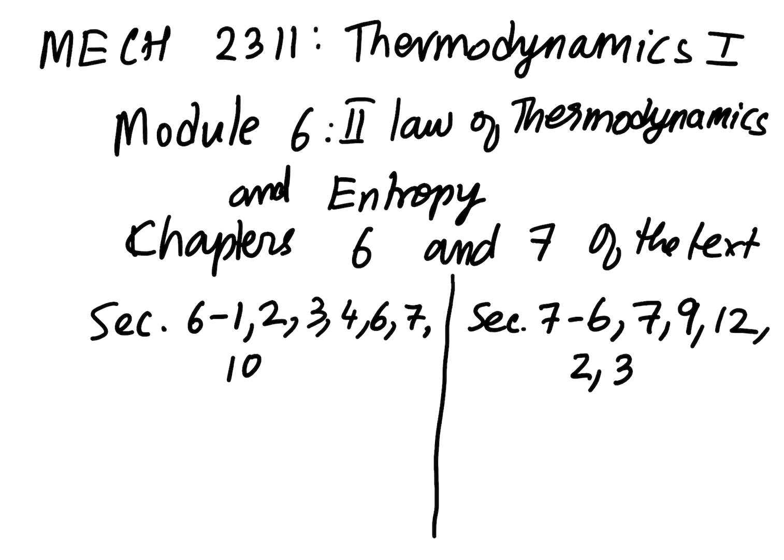Now, let's begin our discussion by asking a simple question. What is the first law of thermodynamics? What did we learn as the first law of thermodynamics?

If you state it in words, that would be: energy can neither be created nor be destroyed. It may be transformed from one form to another.

If you write it in terms of symbols, we wrote it as Q minus W equals delta U plus delta KE plus delta PE. Or in the intensive form, this is Q minus W equals change in internal energy per unit mass plus change in kinetic energy plus change in potential energy.

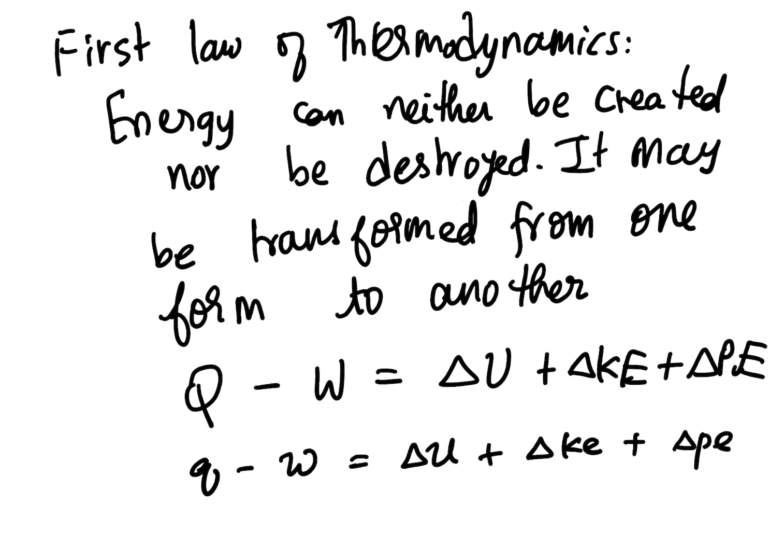This statement, the first law of thermodynamics, tells us an account or balance of the energies.

It merely implies that if you apply heat or do work, you can cause a change in the energy of the system. I'll just write internal energy and leave the other two for simplicity. You can do work and change the internal energy, you can transfer heat and change the internal energy, and so on.

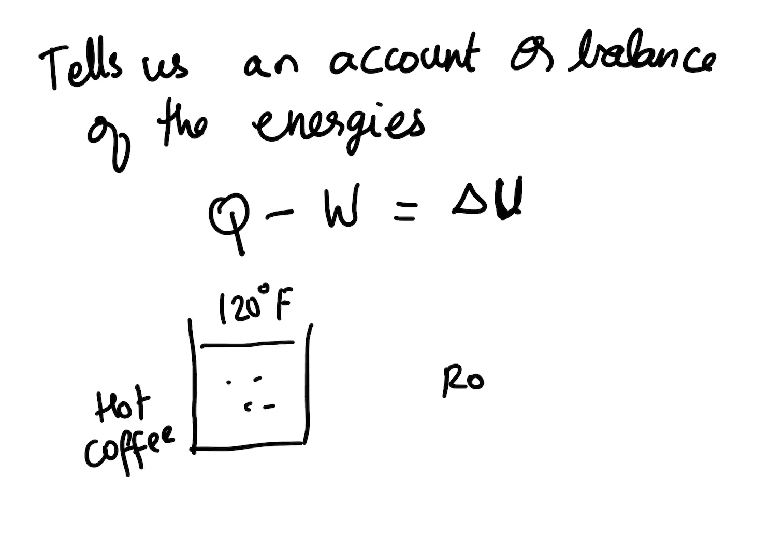Now suppose you have a hot cup of coffee at, let's say, 120 degrees Fahrenheit, and the room is at something like 70 degrees Fahrenheit. You do know what will happen: the coffee will lose its heat if you leave it and come back after some time. Eventually it will reach the same temperature as the room.

All the heat energy that the hotter coffee had has now been transferred to the room, which is at 70 degrees Fahrenheit. So if you think of the coffee, assuming there is no vaporization or evaporation, and think of this as your control volume, you had a certain amount of energy in here. There is no movement of the boundary, so let's just assume that work is 0.

You had a certain amount of internal energy due to the temperature of the hot coffee, and because heat left the system, the heat transferred equals the change in internal energy. In this case, the heat left the system, so heat would be negative, which means the change in internal energy is also negative, meaning there is a decrease in internal energy, or a drop in temperature.

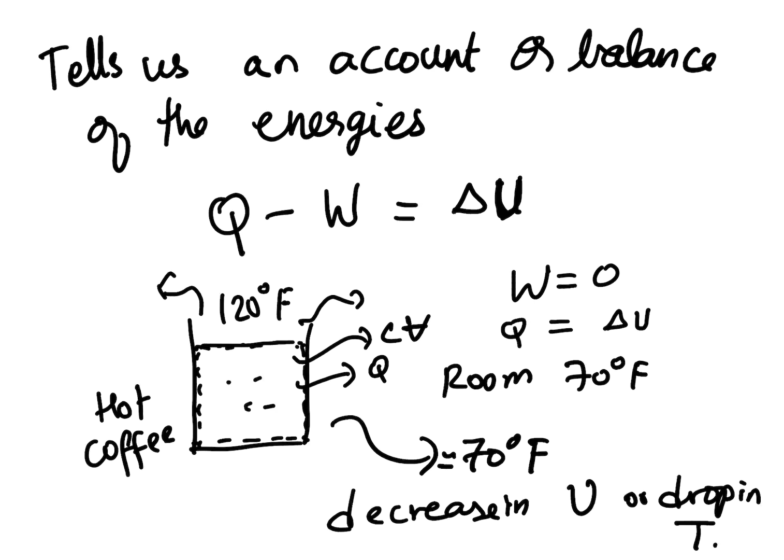This is familiar from everyday life. Something hot cools down eventually over time.

But if you think of the opposite situation: you have your coffee at 70 degrees Fahrenheit after a long time, and you have your room also at 70 degrees Fahrenheit. We never see, or never have seen, the cold coffee warming up by itself.

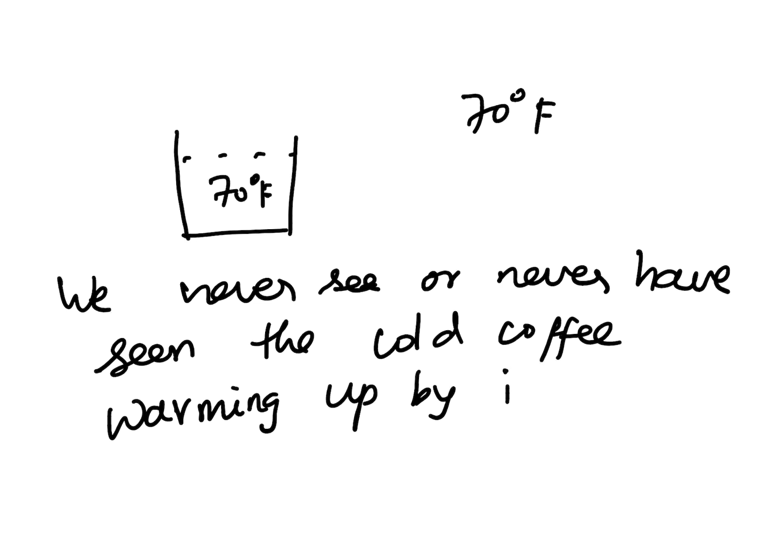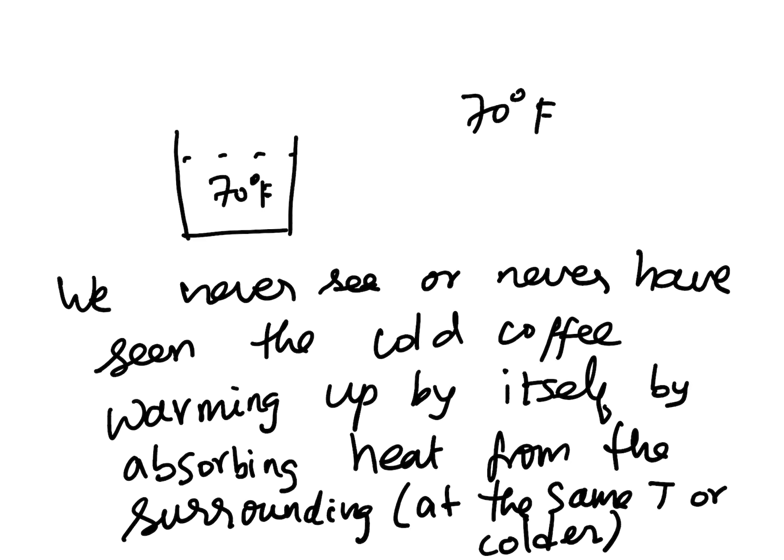by absorbing heat from the surrounding, which is either at the same temperature or is even colder. You never see the coffee that's at the same temperature as the room spontaneously picking up heat and becoming hot coffee again. You never see that happen.

Although there is no restriction on the first law statement that says this cannot happen. There is no reason to think that you could not have heat transfer from the surrounding to the system by itself, leading to an increase in delta U. If Q were positive, then delta U will increase. That's still possible according to the first law.

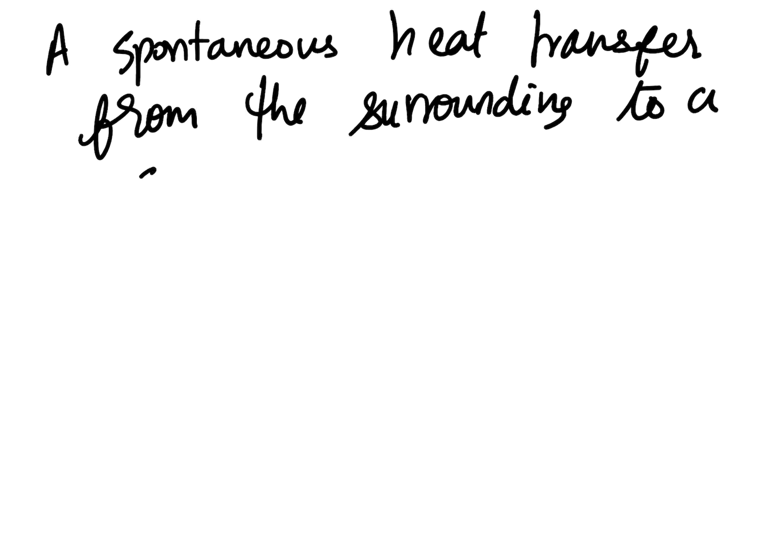So a spontaneous heat transfer from the surrounding to a system that is at a higher temperature is not seen in nature, first of all—it doesn't happen—but it is not forbidden by the first law of thermodynamics.

So we have a disconnect. The first law alone is not enough to completely predict or analyze a thermal system.

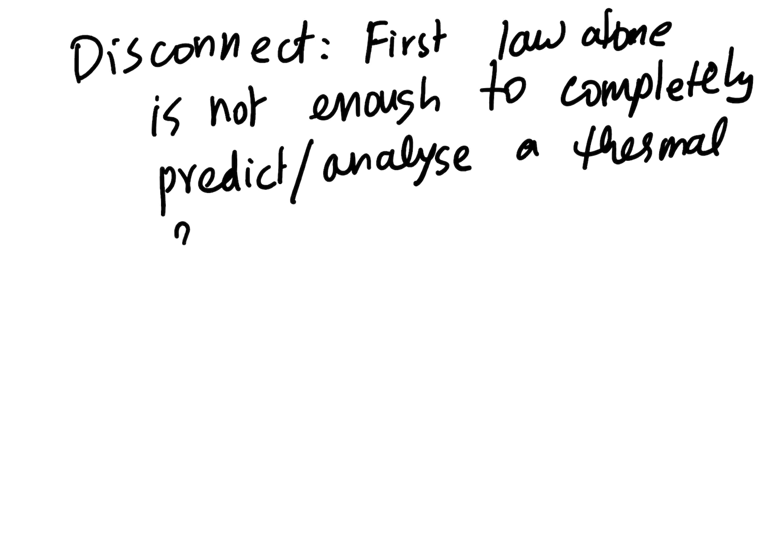Why? There is a certain directionality to natural processes. Things always cool down, hot to cold. Things always go from high elevation to lower elevation. Things always roll down a hill.

A ball rolls down a hill, but never does a ball at the bottom roll up by itself. That never happens. Hot coffee cools down, but cold coffee never warms up by itself.

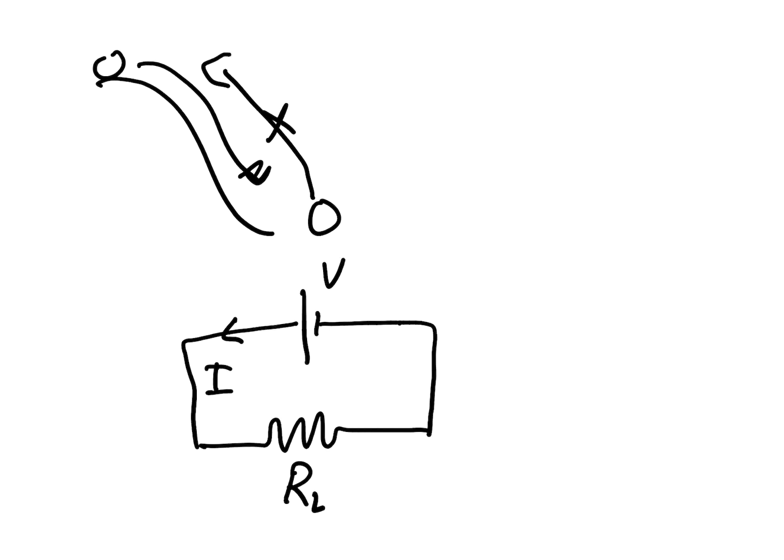If you have a battery connected to an electrical load and you supply a current, you can calculate the power dissipated by the resistor due to heat. Power dissipated due to resistance would be I squared R.

If you put your hand on top of this electrical load, you'll feel that heat being dissipated by the resistor. But you'll never recover this electrical energy even if you supplied the heat that was removed from the resistor. If you ended up heating up the resistor, you cannot produce the electrical energy that was dissipated as heat. So the moral of the story is processes

have a direction, and we need a second law of thermodynamics to tell us what the direction is for a given process to take place. So the second law of thermodynamics was stated or devised to explain or capture what is seen in nature, and there are a couple of ways in which the second law is stated.

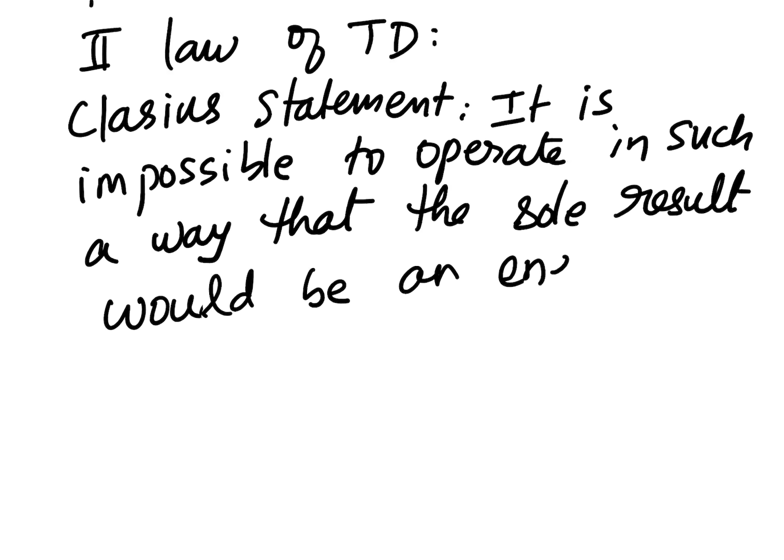Second law of thermodynamics: we have the Clausius statement, and then we have the Kelvin-Planck statement. Let me first state the Clausius statement, which is: it is impossible to operate in such a way that the sole result would be an energy transfer by heat from a colder to a hotter body.

The second law of thermodynamics stated by Clausius is that it is impossible to operate in such a way that the sole result would be an energy transfer by heat from a colder to a hotter body.

Now recall the example about the coffee, which is at 70 degrees Celsius, or a coffee at 70 degrees Fahrenheit. Suppose the coffee is at 70 degrees Fahrenheit and the surrounding is also at 70 degrees Fahrenheit. We wouldn't expect that the surrounding would spontaneously give up heat and make the coffee 120 degrees Fahrenheit while remaining or cooling down below 70 degrees Fahrenheit.

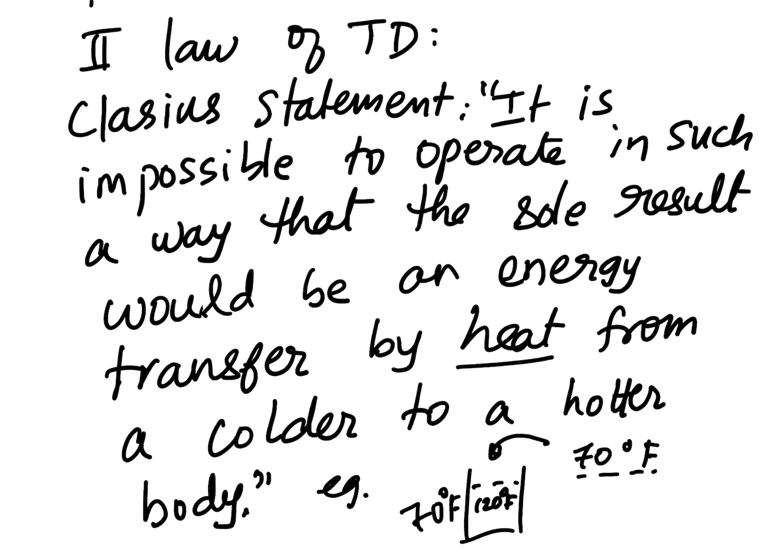It's not physically possible, and this statement of the second law is simply saying that. It's not proving anything, it's just stating the observation that it is impossible to operate in such a way that the sole result would be an energy transfer by heat from a colder to a hotter body. Now there is another version of the second law of thermodynamics, called the Kelvin-Planck statement.

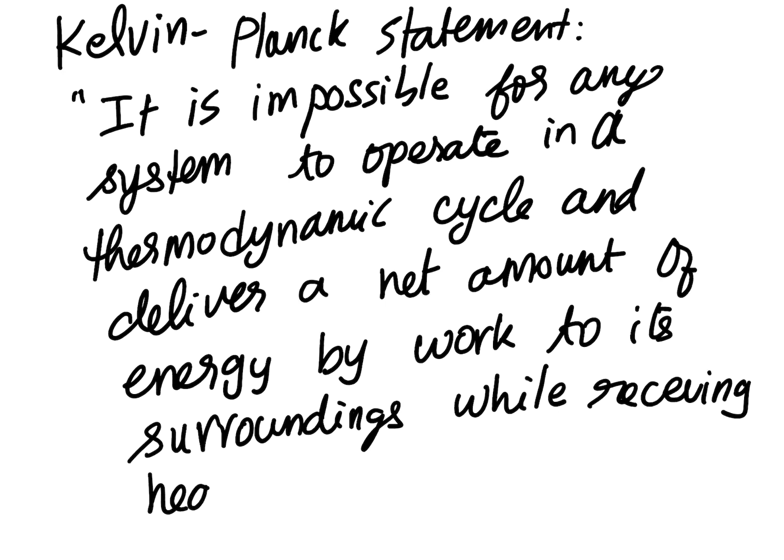It states: it is impossible for any system to operate in a thermodynamic cycle and deliver a net amount of energy by work to its surroundings while receiving heat transfer from a single thermal reservoir.

It is impossible for any system to operate in a thermodynamic cycle and deliver a net amount of energy by work to its surroundings while receiving heat transfer from a single thermal reservoir. This is a long way of saying it's not possible to convert heat completely to work. That's the short version of the Kelvin-Planck statement.

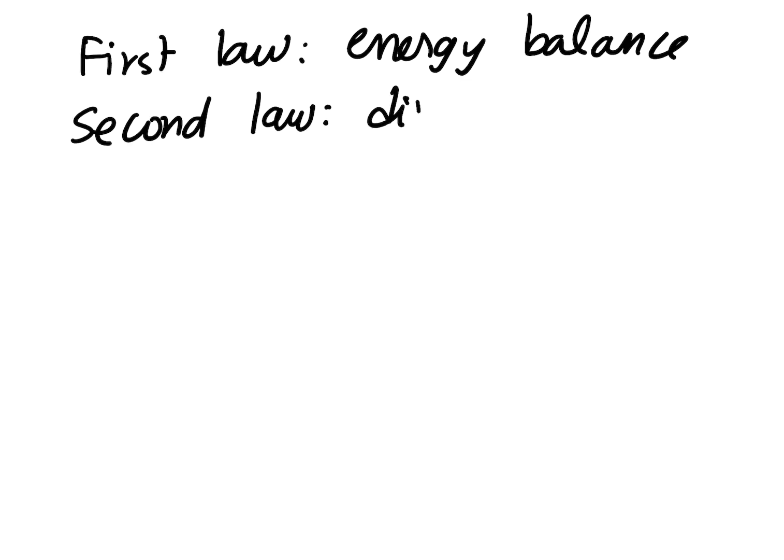Moving on, we spoke about the first law and the second law. The first law, which is an energy balance, and the second law that gives us a direction or natural progression for physical processes. The second law was merely a statement saying some processes, or all processes, can happen only in a particular way, as in transferring heat from a hotter object to a colder object and not the other way around. It was just stating this is the natural and permissible direction for any process.

Any process that is in violation of the second law is deemed to be impossible. That is, any process that claims to transfer heat from a colder object to a hotter object is theoretically forbidden by the second law, and so far has not been observed in everyday engineering or physical experiments.

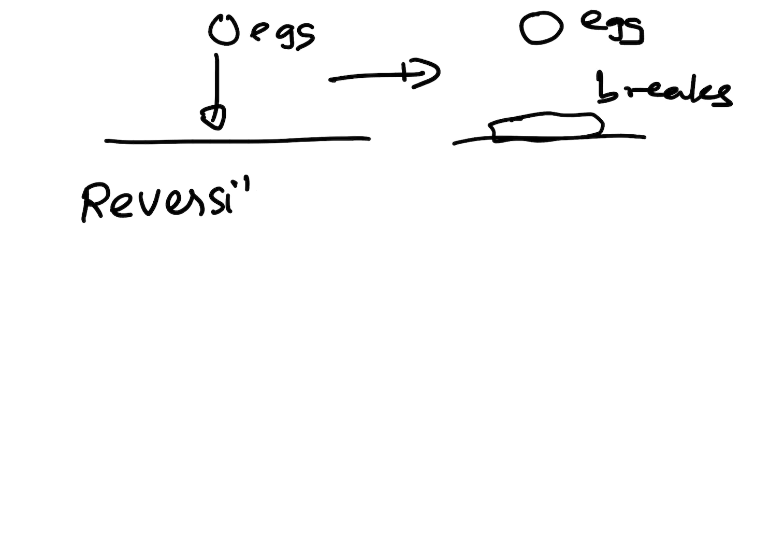Now, we can think of a question: if you have a surface and you drop an egg onto it, it crashes and breaks. You can watch this movie a million times, you can play this back, but in reality you will never see a broken egg organize itself and turn into an egg that is unbroken. The reverse will never happen, which brings us to realize that there are processes that are reversible and then there are processes that are irreversible.

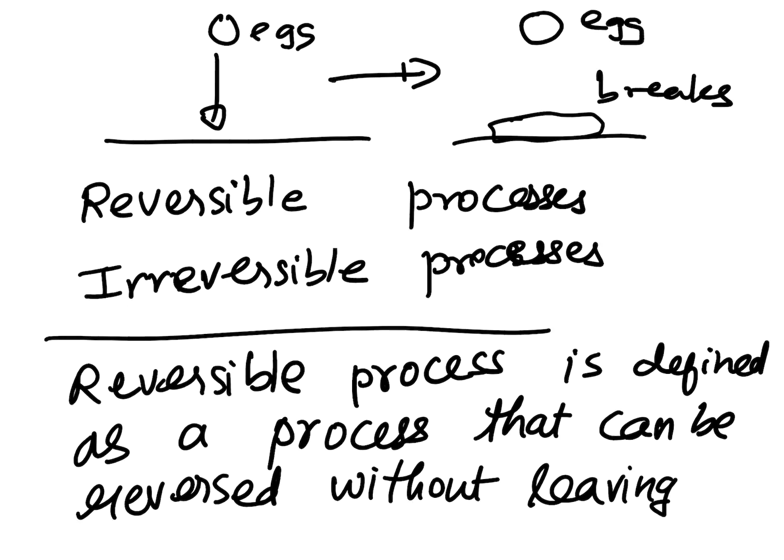Reversible processes and irreversible processes. So we need to define what these are. Let's first define a reversible process. A reversible process is defined as a process that can be reversed without leaving any trace on the surroundings. That's the really important point: without leaving any trace on the surroundings.

And any process that is not a truly reversible process is an irreversible process.

For example, if you have a surface and a block, and you are sliding the block on the surface, what happens at the interface between the block and the surface? You have friction, and friction heats up both the block and the surface. You know this from everyday experience: if you slide the block fast enough, the surface is going to get a little bit hotter.

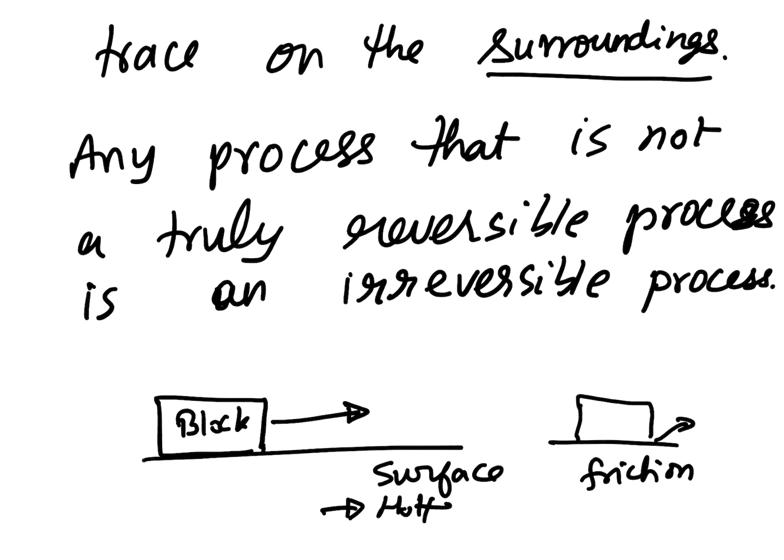If you think of your block as your system and the rest of everything as the surrounding, because of the movement of the block along the surface, the surrounding is going to get hotter. You have heated up the surrounding, making it a little bit hotter than it was.

Now, if you slide the block back, that is, if you reach this position and then reverse your motion and slide it back, what will happen? You are not going to get the heat back. You are not going to restore the surrounding to its former state. When you bring back the block here, there is more heat dissipation on the way back as well. Friction generates heat in the forward stroke as well as the back stroke, and as a result the surrounding gets even hotter.

By restoring the block to its original position, even though your system was taken from state 1 to state 2, from position 1 to position 2, and brought back from position 2 to position 1, you have restored your system to the original state, but you have left the surrounding hotter than it was when you began. So this process is an example of an irreversible process, wherein the friction heats up the surrounding and moves it away from its original condition or state.

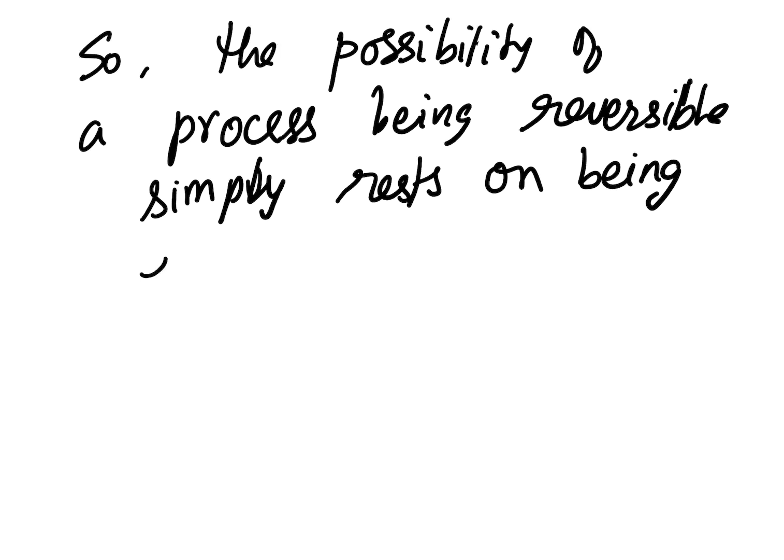So let me write a statement: the possibility of a process being reversible simply rests on every step of the process being reversible and without any irreversibilities.

Essentially, this statement means all real processes are irreversible to varying degrees. That's the only difference. They may be more irreversible or less irreversible, but they are irreversible.

All real processes are irreversible to varying degrees, and what we call a reversible process is an idealization that is used as a reference in analysis. It's not something that's found in nature. It's usually a reference in analysis as the ideal case, that no real system can attain it, but we wish to attain it. So that also tells us there are irreversibilities in real world processes.

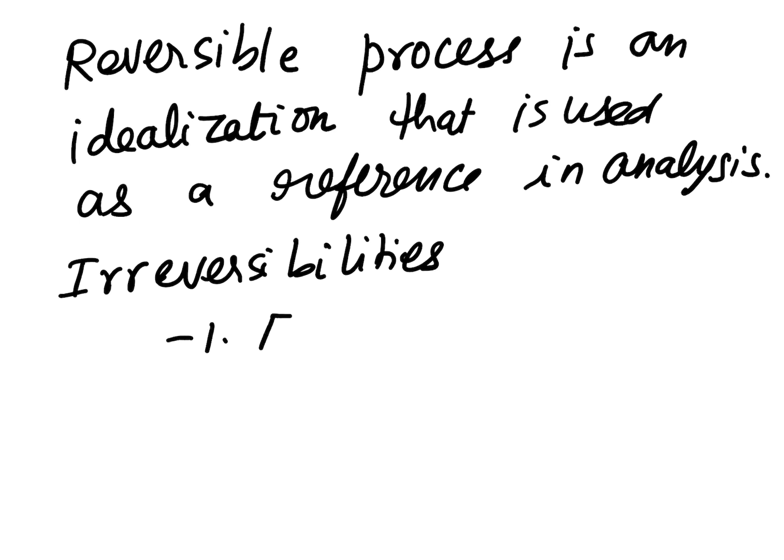The main irreversibility that we encounter often is friction. Friction could be between solid and solid, like the example we saw. It could be between solid and fluid, like flow past a surface, or it could be within the fluid due to viscous effects or velocity gradients. It's very common for us to think of friction.

If you have a piston and a cylinder, with gas inside, and you think of your control volume to be the volume within the piston, you have friction everywhere. You have friction when the piston slides against the walls of the cylinder. You have friction or viscous effects within the gas, and you have viscous effects between the gas and the wall of the cylinder. So you have gas-wall friction, gas viscosity, and cylinder-piston surface friction. You have all types of friction.

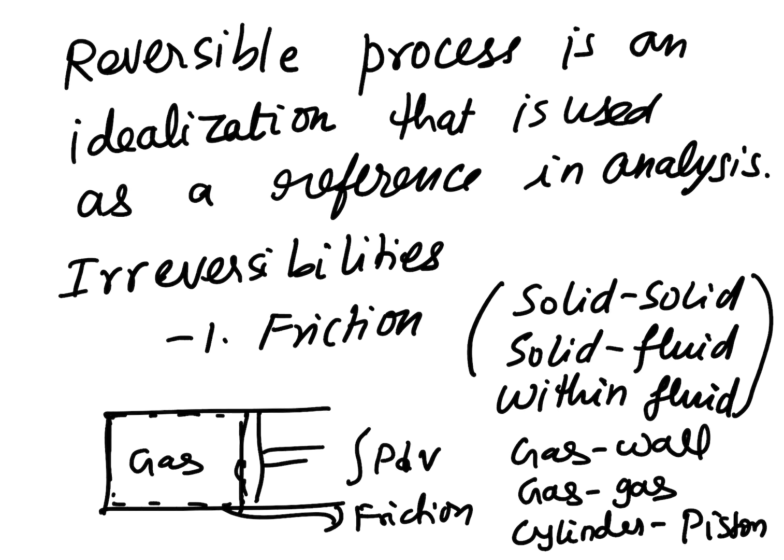That's why if you do a certain amount of work, let's say a certain amount of boundary work by compressing the cylinder, there is some heat generation at the boundary. So let me write this on a separate page. If I have a piston and I compress it from V1 to V2, P dV is the work I do. There is heat generation at the surfaces. Wherever friction acts, friction generates heat.

So that is heat that leaves the system. If you have very poor insulation or no insulation, that is heat leaving the system. So you have Q minus W equals delta U. That is, if you had no heat transfer, if you didn't generate any heat, if Q equals 0, the delta U, or the increase in internal energy of the gas, is due to the work done, or all the work done goes into heating up the gas.

All the work done raises the internal energy of the gas. But if Q is not 0, then you have a lesser amount of energy available to raise the internal energy of the gas, or in other words, some of your work input that you put in has been wasted because of friction.

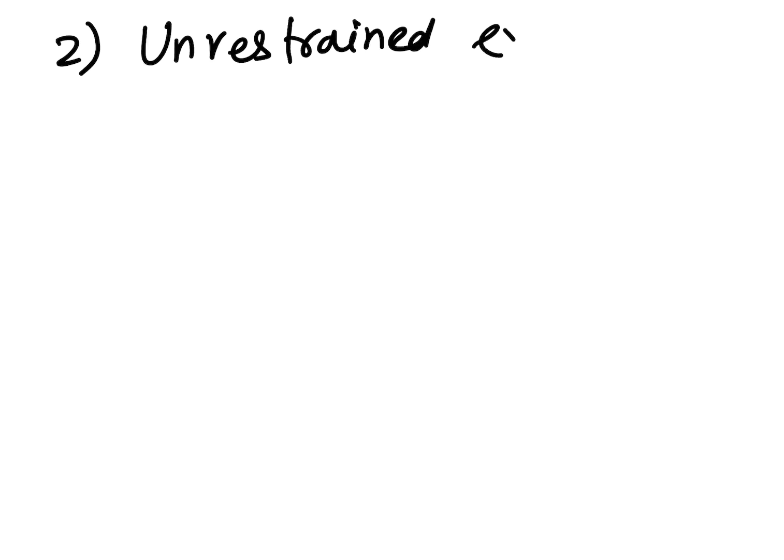So irreversibilities always cause undesirable effects that we wish to mitigate, and we'll see more about this in examples. Another type of irreversibility is the unrestrained expansion of a gas. Now, why is this an irreversibility?

If you have a gas that's highly compressed, like for example this could be CO2 that's highly compressed, and you are locking this down by applying restraining forces, if all of a sudden you remove these forces, you are going to have the gas push back against the piston and let it freely expand. So you have the gas pushing back and you have unrestrained expansion.

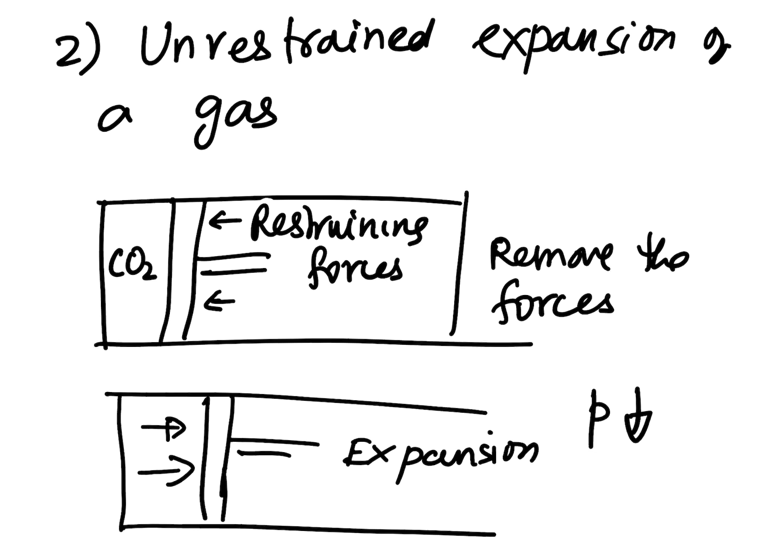If you expand too fast, what happens? The pressure drops quickly, which can cause the system to cool down. So the expansion will cause the pressure to drop. A drop in pressure is accompanied by cooling or condensation, which causes cooling and causes heat to leave the system.

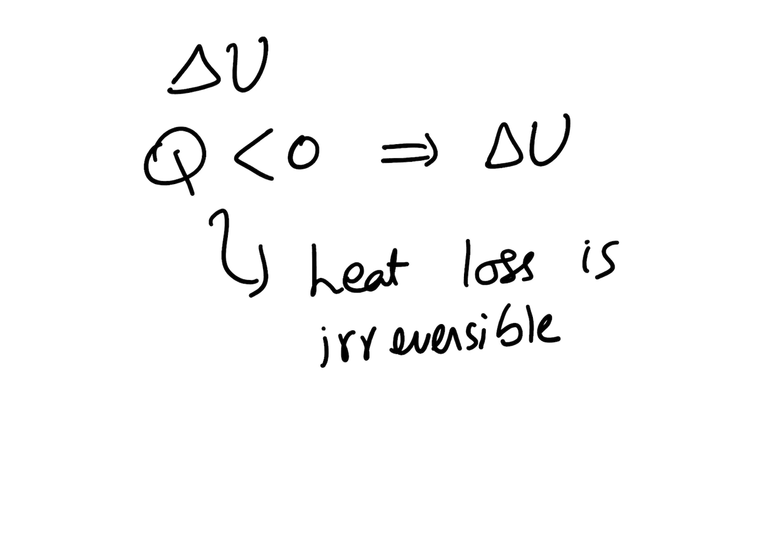Heat loss. Now what that means is you have a certain amount of gas with a certain energy content delta U, and because of the heat loss, the energy content of the gas is irreversibly lost. This heat loss is irreversible. It's not coming back when the system comes to a stop, or when the gas stops expanding. So this irreversible heat loss is a consequence of unrestrained expansion.

The third form of irreversibility is heat transfer, which is, again, a direct consequence of the second law. If you have a hot object, it cools down, but whenever you have an object that's hotter than the surrounding, it never spontaneously warms up. So it always flows one directionally.

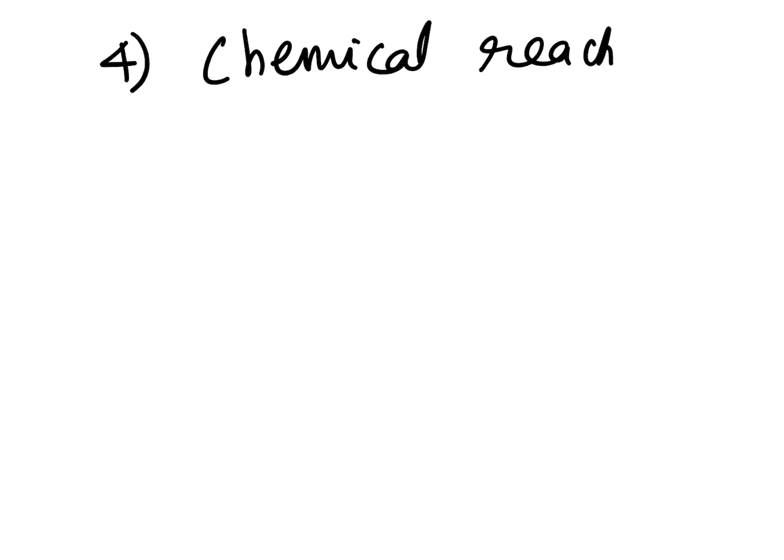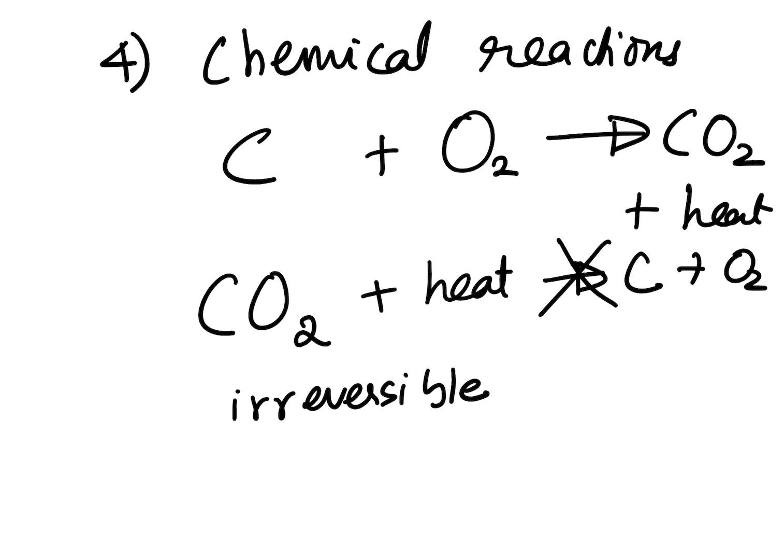Another type of irreversibility that is encountered is chemical reactions, although in this course we don't see much of that. For example, if you had a fuel, carbon, and you combusted that, you get CO2 plus heat. Now if you take CO2 and you just apply the same amount of heat, you're not going to get the carbon and oxygen back. This doesn't happen. Usually chemical reactions are irreversible, although we won't deal with much of that in this class.

Now within reversible processes, we want to distinguish between what is called internally reversible and externally reversible processes. Now what is internally reversible? If a process is called internally reversible, if no irreversibilities exist within the boundaries of the system during the process.

And an externally reversible process is one in which no irreversibilities occur outside the system boundaries during the process.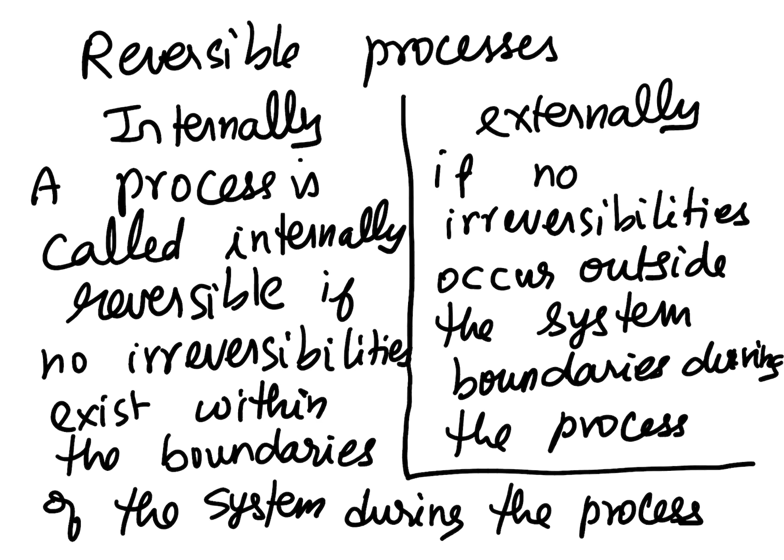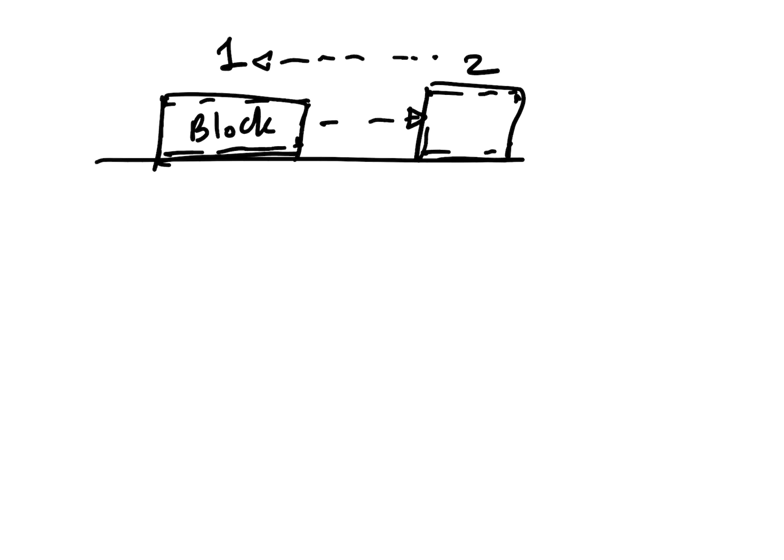Now let's bring that example back. You have your block, it is at position 1, you take it to position 2, and then you bring it back to position 1. Now during this trip, if you consider the block to be your system, we are just moving it from 1 to 2 and bringing it back. Within the block, which is basically a solid, there is no friction or any other irreversibilities in this case. So this would be an example where this is internally reversible.

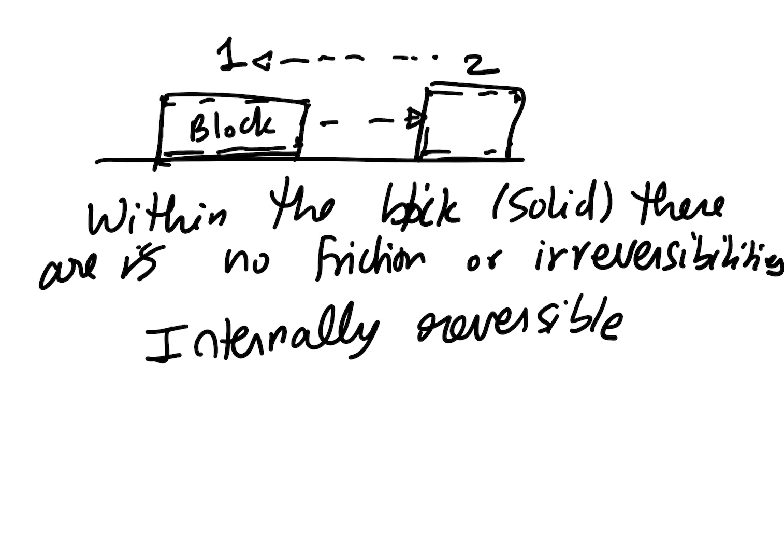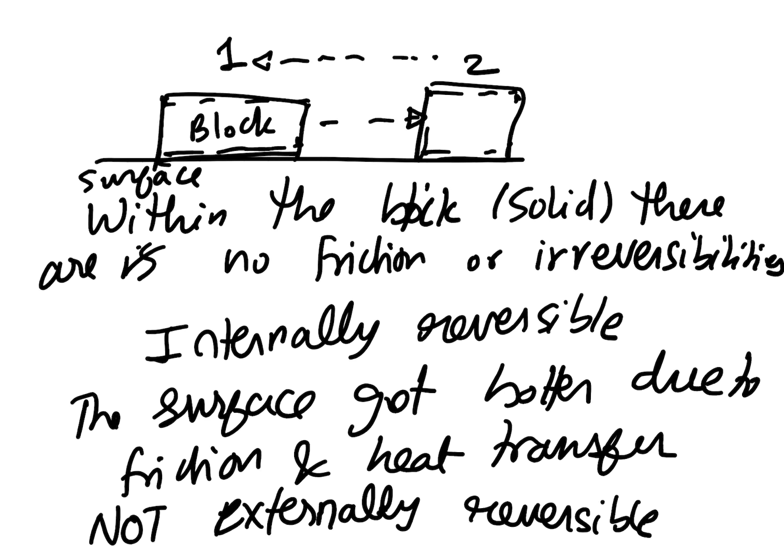But if you think of the surrounding, that is the surface, it got hotter due to friction and heat transfer. So as far as the surrounding is considered, this process is not externally reversible. If you don't look at the surrounding, this process is internally reversible. If you look at the surrounding, this process is not externally reversible.

A process is reversible if it's both internally and externally reversible. Most processes that we can think of are irreversible, but many of them are at least internally reversible. So most are irreversible, period.

Many are internally reversible, but they change their surroundings irreversibly. And then all processes in nature are irreversible because no processes are externally reversible as well. That would be an exception that's not been found so far.

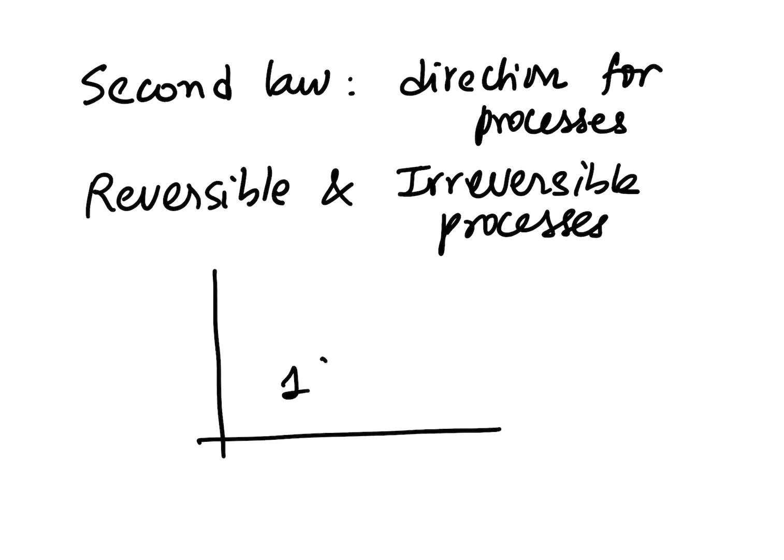What we can understand from that is if you take a particular state 1 to 2, okay, could be on, let's say, PV coordinates. There is a path from 1 to 2. There are an infinite number of paths from 1 to 2. You could take any path to go from 1 to 2, and then there is one path which is reversible, and then there are many others that are irreversible.

Now all these irreversible paths, they differ from each other in the degree of irreversibilities. They differ in the degree of irreversibility.

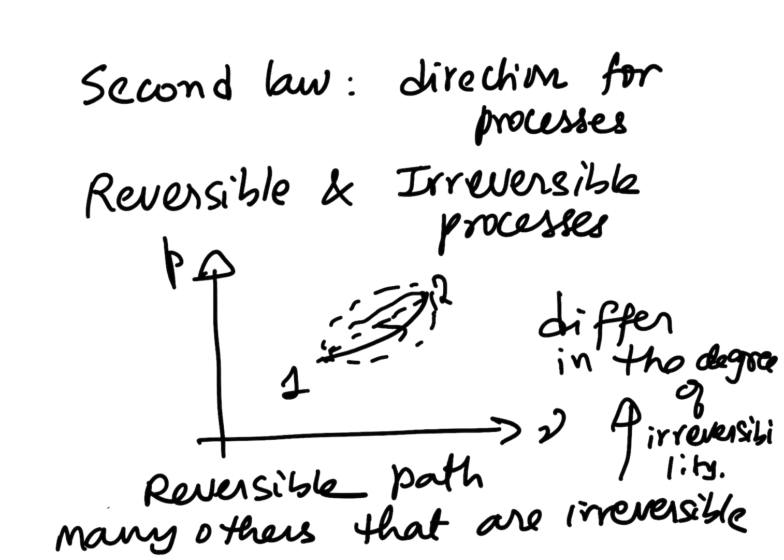Now, if you have a need to go from state 1 to state 2, you want to choose the path that is the most closest to being a reversible path. Just keep that in mind. Any good engineer would design the path 1 to 2 as close as possible to being reversible, to minimize energy losses. Now, what do I mean by that?

Suppose you have Q minus W equals delta U. You want to make, if you are transferring a certain amount of heat, the heat that leaves the system is usually due to friction or irreversibilities. Now, if you want to convert this heat into either work or internal energy or both, you want to make sure that the heat loss is minimum, that this Q out term is as small as possible.

If you want to design a process, you want to restrict or reduce the amount of irreversibilities such that all the heat that you provided goes into doing something useful, like work or raising the internal energy of the system. Why do you want to do this? Because Q in is the heat that is input, and that's directly related to the energy bills. The heat input is directly due to the amount of fuel that you combust to create that heat. So you don't want your energy to be wasted, because that will incur more cost, and that's what we, as engineers, look out for.

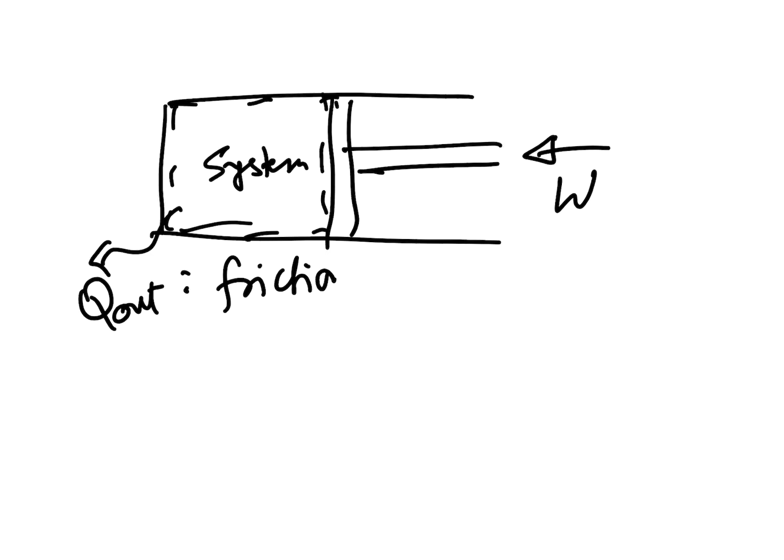The other situation is if you have a piston, for example, if you try to do work on the gas and this is your system, again the heat that leaves the system is due to friction or irreversibilities. And if you think of Q minus W equals delta U, if you do work to raise the internal energy of the gas, you want this to be as small as possible so that all the work that you do is converted into internal energy.

And this work is, let's say, done by connecting to a horse and wheel, or it's connected to a cycle like a bicycle, or it's connected to a motor. Whatever it is, work that you do mechanically, you have to expend energy for that, which comes with a cost. So this is directly related to the energy or money that you spend, and to get useful outcomes out of it, you need to minimize the irreversibilities in this system.

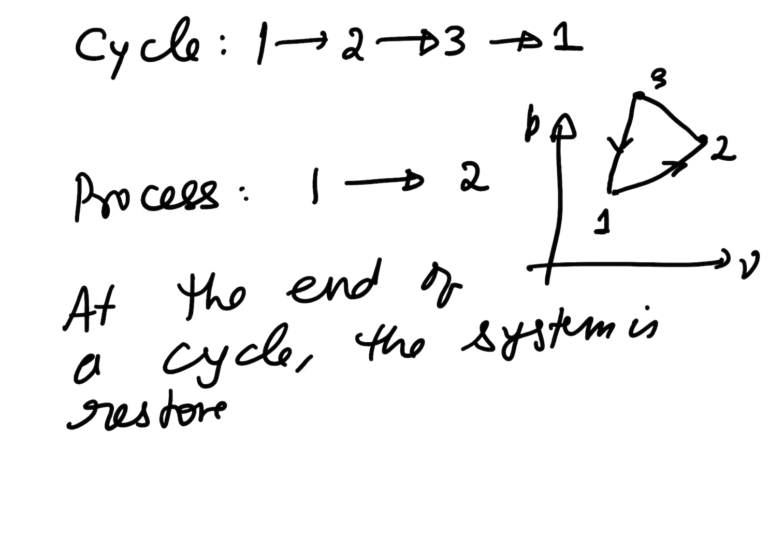Now a cycle is one in which you could have multiple states that you visit, 3 and then 1. So if you go from 1 to 2 to 3 and back to 1, that is at the end of a cycle. At the end of a cycle, the system is restored to its initial state. That would be a cycle.

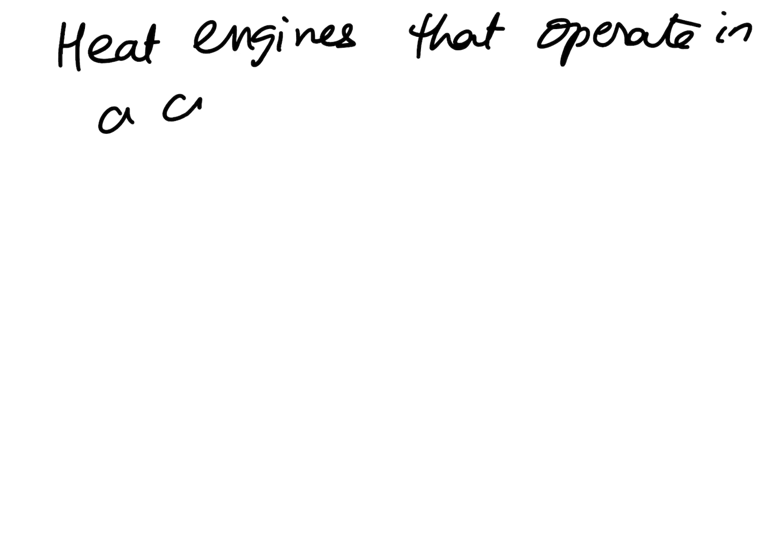And to go from one state to another, we have different processes. These processes could be reversible, they could be irreversible, but at the end of the cycle, the system comes back to its initial state. It may be having a lot of intermediate states. Now, one reason why we define cycles is that we like to have devices, like for example, heat engines, that operate in a cycle to produce mechanical work from the heat energy of a working fluid.

Okay, now what is this heat engine? Obviously this heat engine operates in a cycle. You do know that because your IC engine...

That runs your car basically has these 4 strokes, where energy of the fuel, chemical energy of the fuel, to be very specific, chemical energy of the gasoline, is converted to mechanical energy that drives the wheels, that makes the wheels spin. There is a lot of energy conversion steps from the chemical energy of the fuel to the mechanical energy that drives your car. And you can think of, if there are multiple processes between these two end states, they can be reversible, they can be irreversible.

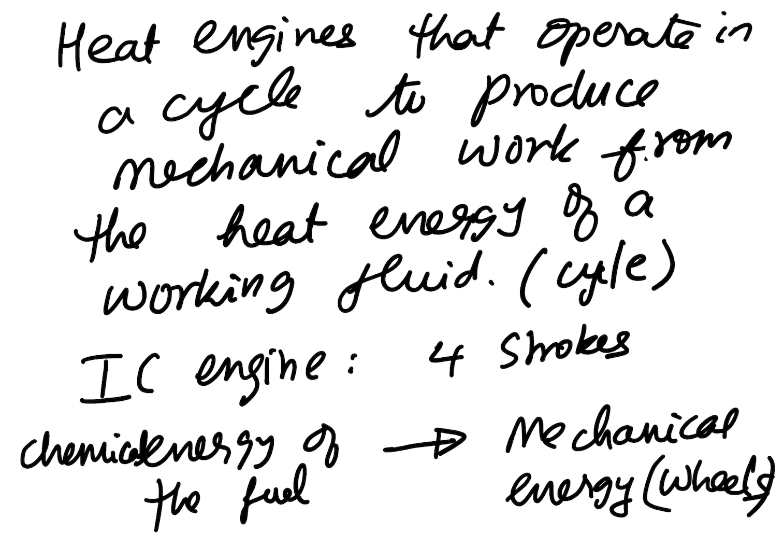Within irreversible, they can be slightly irreversible, they can be moderately or extremely irreversible, making the process cost effective or not cost effective. So we need to understand what is the ideal way to operate a heat engine, so that we can understand how far are we when we design real processes.

Okay, so first of all, what is a heat engine? A simplest heat engine that you can imagine is also depicted in figure 6-10. It consists of 4 components. The simplest heat engine can be constructed with 4 thermal devices, one being a boiler.

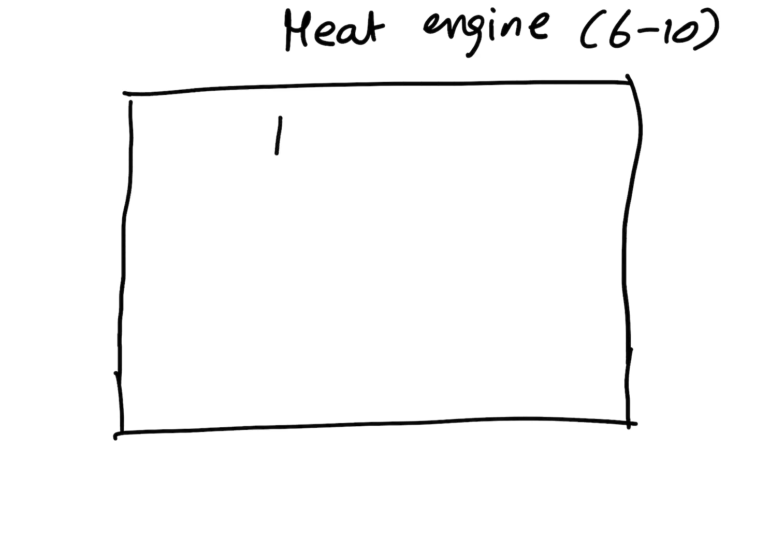Let's say we start with a boiler where you produce hot steam. So from the boiler you have hot steam, you input energy as heat, you vaporize the water, turn it into saturated vapor or even superheated vapor, and then you flow the steam onto a turbine.

A turbine expands the hot steam at high pressure. It converts the internal energy and kinetic energy of the fluid to mechanical energy, which is shaft work. So you input heat here, you extract work here.

Okay, so from the turbine, going into the turbine you have high temperature, high pressure steam, and coming out of the turbine you have spent steam, which is usually high temperature and low pressure. Have spent steam that's coming out, and then you have what is called a condenser.

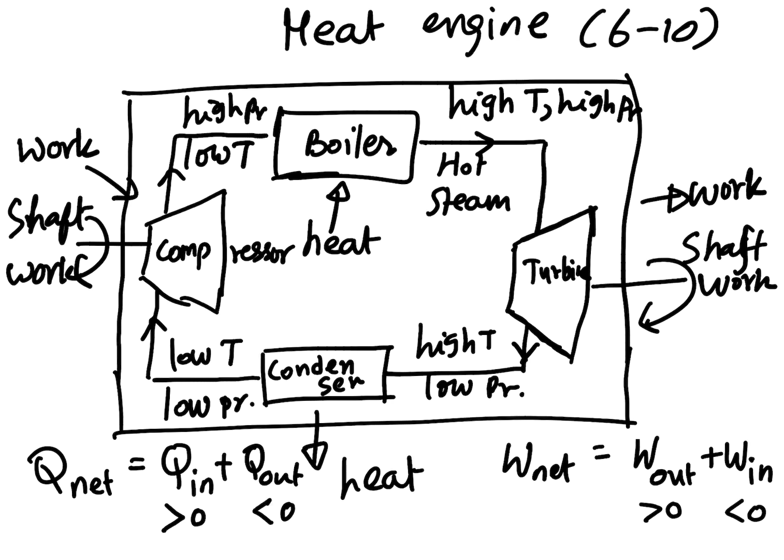So a heat engine is really a system that converts thermal energy into mechanical energy, and it requires at least 4 components identified here to carry out this process. So what would be the efficiency of such a system? If I write work net is work out plus work in, and Q net equals Q in plus Q out.

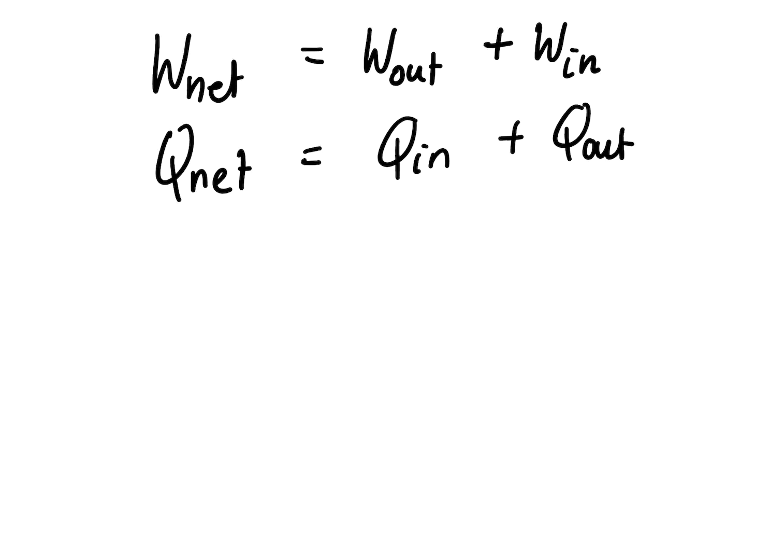Now if you think of the boiler, you provide the heat there. If you think of the condenser, the heat is rejected by the fluid to the surrounding, and usually this is irrecoverable. That is, you just eject the heat. If you have your car radiator, the hot water dumps the heat through the car radiator into the atmosphere, and you don't get it back. It's done, it's gone. So it's not something you can reuse.

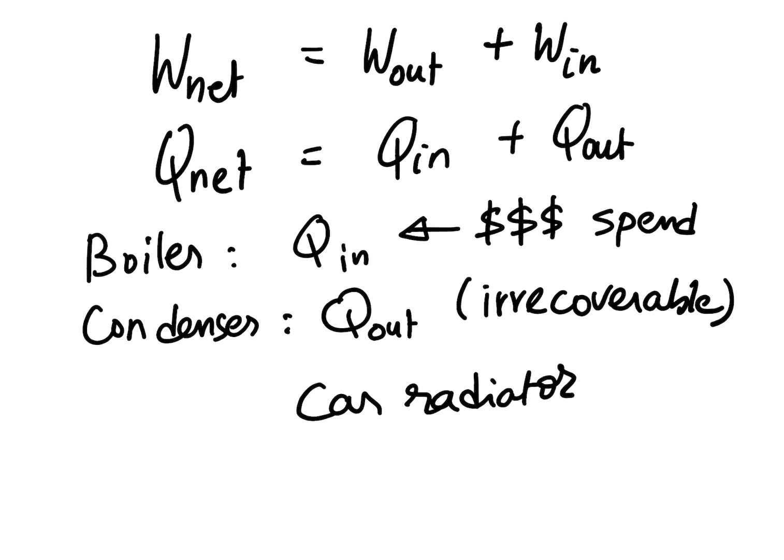So whatever heat you provide at the boiler is really not connected to the heat that is dumped at the condenser. So we can say that this is the dollar that you spend. This is related to the energy bill that you would get by providing heat.

At the turbine, you extract a certain amount of work as shaft work. You have a rotating shaft at a certain RPM. You can use it to drive some other machines like a camshaft or an electrical generator, and so on. At the compressor, you input work. You have to drive the compressor by applying electrical power or some other mechanical power, and this is again related to the dollar that you spend.

Now the net work output that you get, if you are trying to use this heat engine to produce mechanical work—let's say to run a generator that will power a portable home generator, or run an IC engine—the net work output is what is important, because this is your dollar that will get in value. This is the value that you will get for your energy bill.

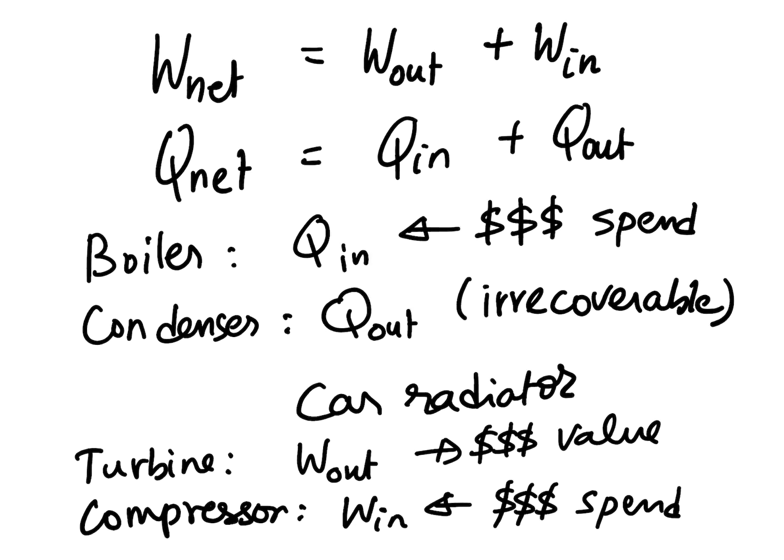So if we think of the work net output divided by the heat input, this would be the efficiency of conversion from heat to work. This is formally called the thermal efficiency, which is the net work output divided by the heat input, the net work output being the work output plus the work input, divided by Q in.

Just remember the sign convention for work: work is positive if it is done by the system, and heat is positive if it is transferred to the system. So this is the thermal efficiency of a heat engine. Let me rewrite that here: work output plus work input, divided by heat input.

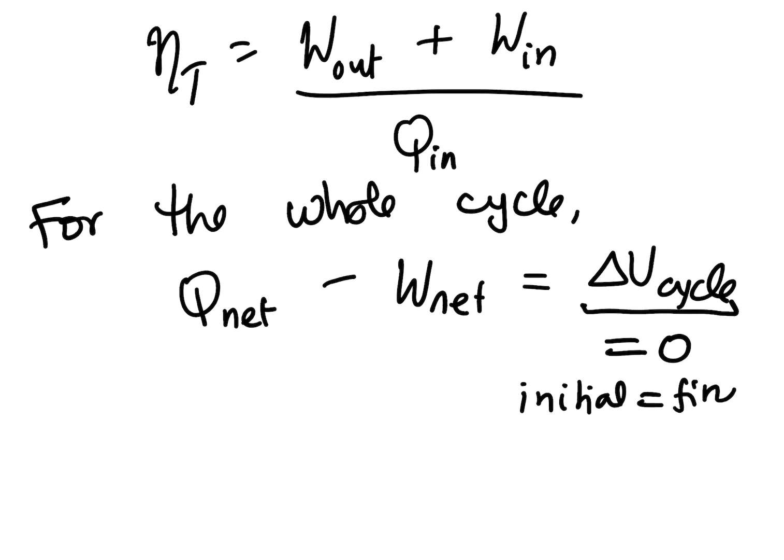So for the whole cycle, what do we have? Whatever your intermediate steps are, you can write Q net minus W net should be equal to delta U for the cycle. Now delta U for the cycle is 0, because initial state is same as the final state—this is simply U1 minus U1, making it 0. So you have Q net equals W net, that is Q in plus Q out equals W out plus W in.

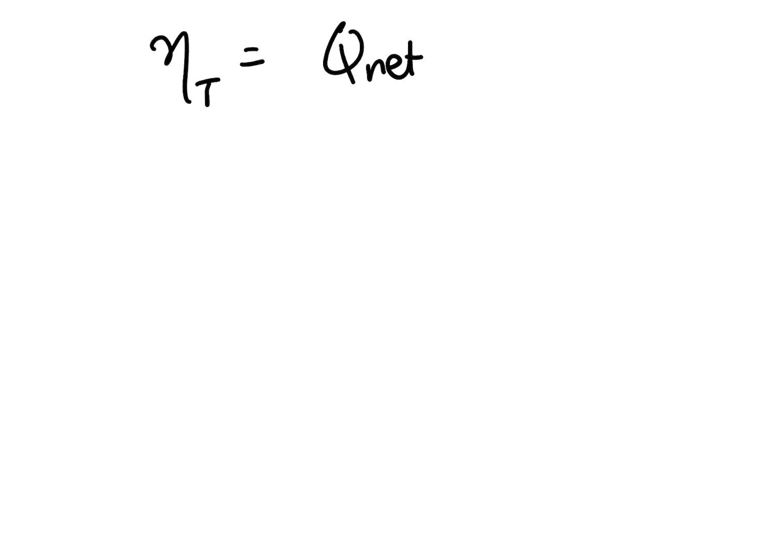So if I substitute in thermal efficiency, this is Q net divided by Q in, which is Q in plus Q out divided by Q in. This is 1 plus Q out divided by Q in, the thermal efficiency. Remember that Q out is a quantity that's negative by our sign convention, so the plus sign is really like writing 1 minus the magnitude of Q out without the sign, divided by Q in.

So I'll write it again neatly: thermal efficiency is 1 minus the magnitude of Q out divided by Q in. So if you input certain joules of energy and the heat extracted from the condenser is certain joules, you can simply calculate the thermal efficiency using this formula.

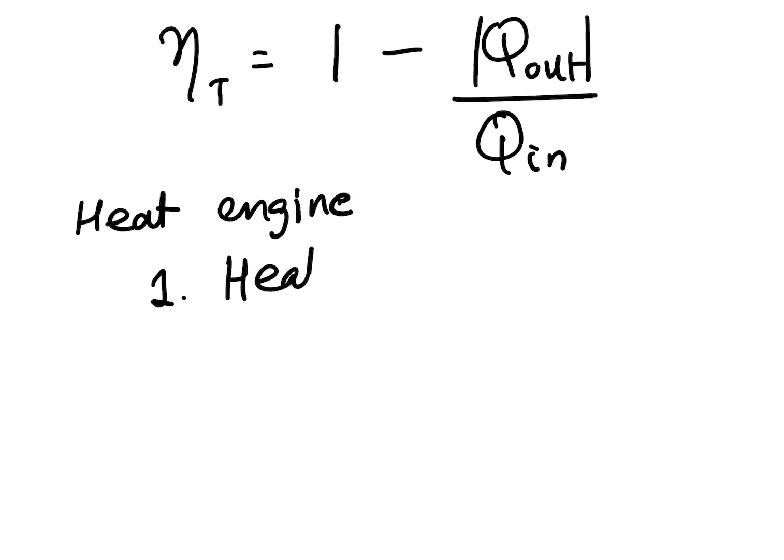Now I've told you that the heat engine consists of 4 steps: one being a heat addition step at the boiler, and the other being an expansion step, or work extraction, at the turbine, and the third being a heat rejection or heat removal at the condenser, and the fourth being a compression or work input step at the compressor. The heat engine consists of 4 processes that together make a cycle.

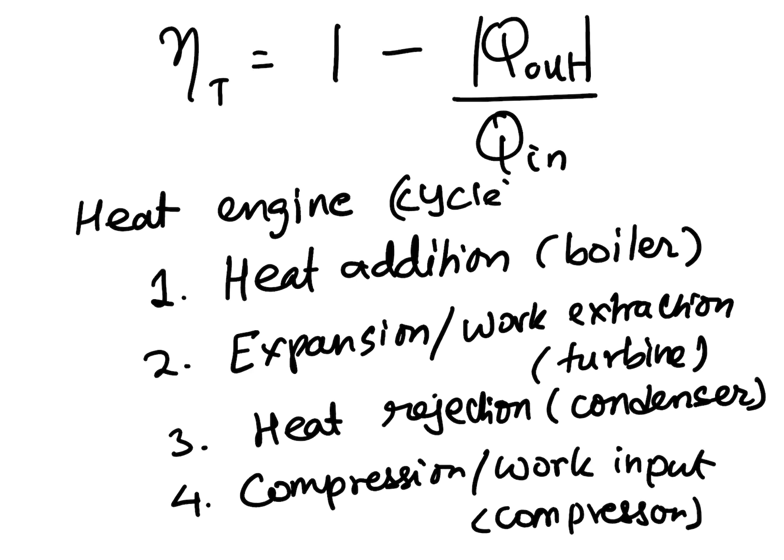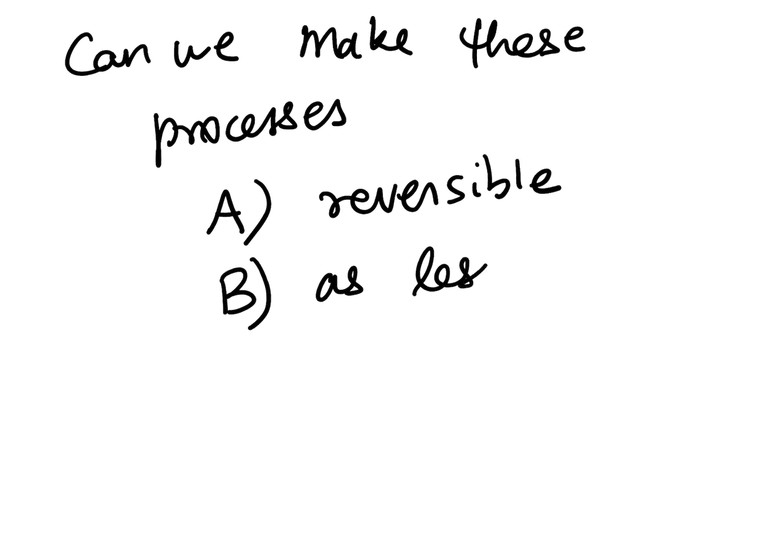Now you have 4 processes. The next question is, can we make these processes either reversible—if you make them reversible, that would be the best world—or at least as less irreversible as we can. We don't really know the latter, we don't know what is the best way to do this.

But at least we can do an analysis that gives us the thermal efficiency, which is 1 minus Q out divided by Q in, the maximum possible efficiency that you can attain. You can at least calculate what is the efficiency of this cycle when you have a reversible process. That's what we are going to do next.

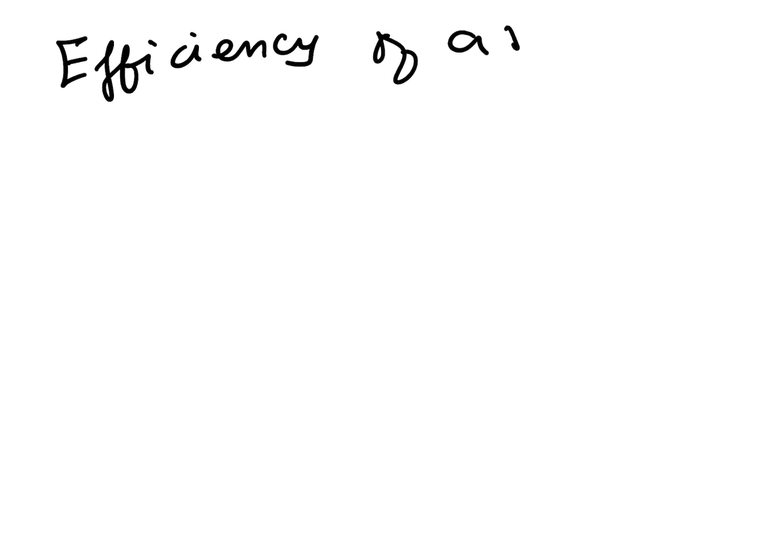We are going to calculate the efficiency of having reversible steps in a heat engine cycle. Take for example step 1, which is heat addition. What's the best way to add heat, or what's the least irreversible way to add heat? That's the question.

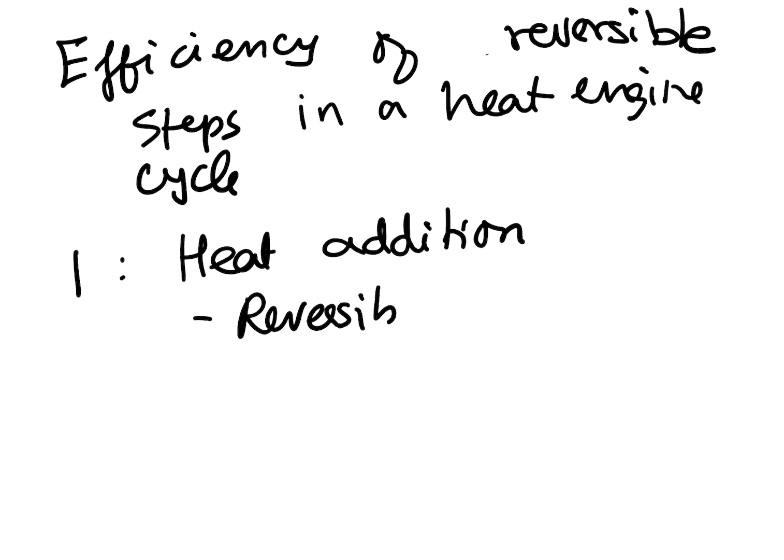So to identify the ideal, reversible ways to carry out the different steps in this heat engine cycle, the French physicist Sadi Carnot came up with these steps. For heat addition: a reversible isothermal heat addition, wherein the temperature is constant, equal to the temperature of the hot reservoir. For example, if you have your boiler transferring heat, and the reservoir is at temperature TH, you want to make sure the temperature inside your system is also TH, so that the heat transfer takes place at maximum efficiency. So, reversible isothermal heat addition, and then the second step being the expansion.

Actually, let me back up a little.

So if you are thinking of heat addition, you have Q minus W equals delta U. If you have isothermal heat addition, this term is 0, so all the heat you added turns into potential of the gas to do work. So Q equals W.

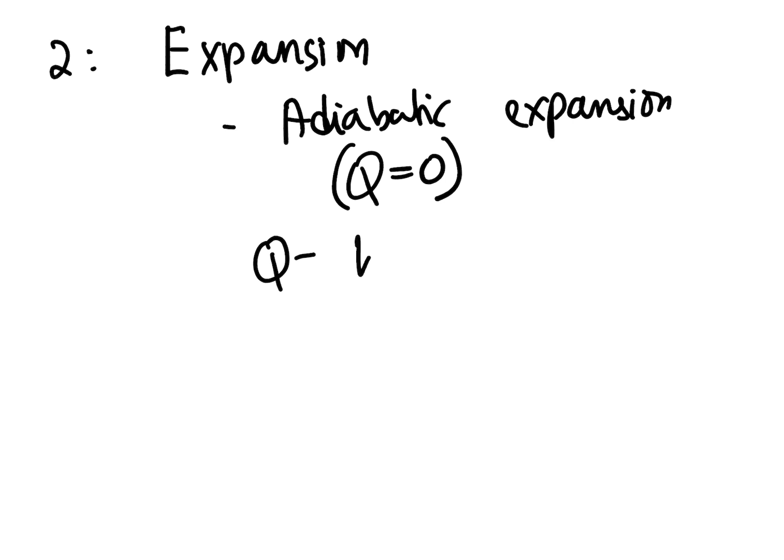The second step being the expansion, we want to do that as adiabatic expansion. What is adiabatic? Recall, the heat transfer or heat losses is 0 due to proper insulation. So Q minus W equals delta U, or in other words, all the internal energy of the gas goes into being converted into mechanical work. That is maximum conversion to work.

So for the second step, we want to do an adiabatic expansion, and for the third step, we have isothermal heat rejection for the same reason that I mentioned before, and the fourth step being adiabatic compression, so that all the work input that you put goes into increasing the internal energy and is not lost as heat.

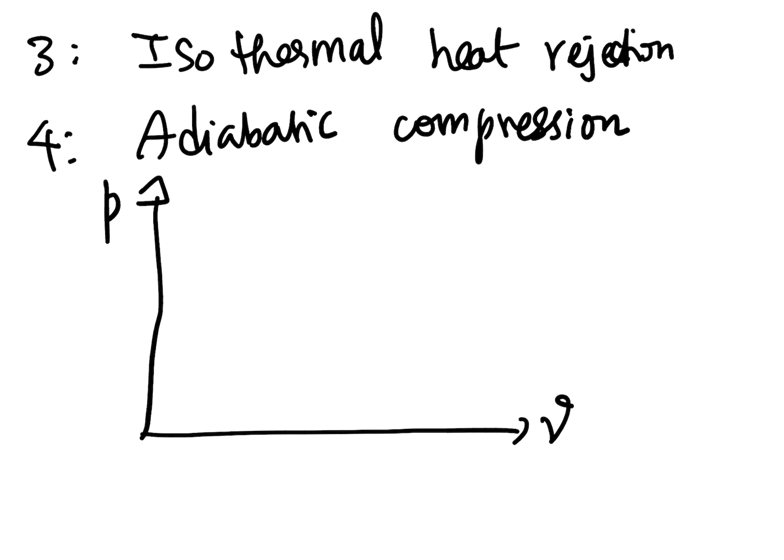So if I depict this in a PV diagram, pressure versus specific volume, I have process 1 proceeding at constant temperature to state 2. From state 2 I have an adiabatic process in which heat loss is 0, to go to state 3. From state 3 I have an isothermal process which is a heat rejection to state 4. This is again TL equals constant. Then from 4 to 1 I have another adiabatic process in which heat loss is 0, that is adiabatic compression.

So these four processes - isothermal heat addition and rejection, and adiabatic expansion or compression - this represents the most ideal or reversible way you could do this heat engine cycle, and this cycle is called the Carnot cycle. The figure that I drew in the last page, which is also in figure 6-37, is called the Carnot cycle, and you can derive an efficiency for the Carnot cycle.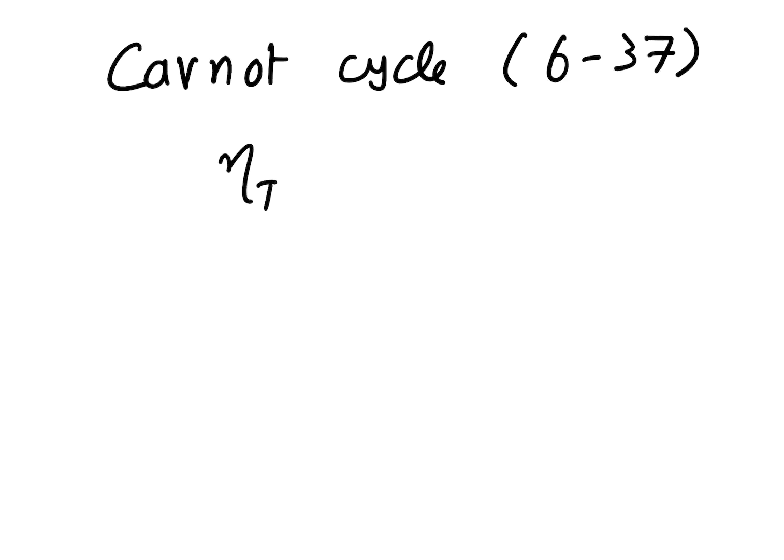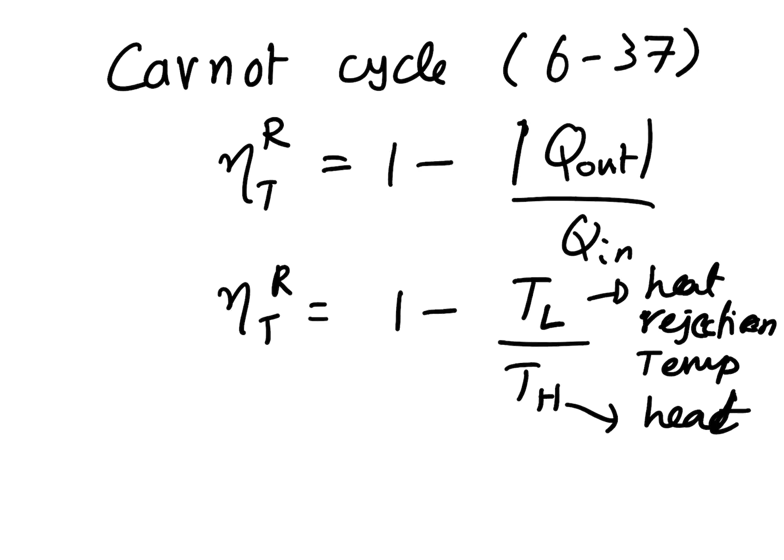As 1 minus, we do know that this is equal to Q out divided by Q in. This is equal to 1 minus the temperature at which heat rejection takes place divided by the temperature at which heat addition takes place. So this is the heat rejection temperature, and this is the heat addition temperature. This is something you should remember, because we will always use the Carnot efficiency.

Carnot efficiency is the maximum possible theoretical efficiency.

Now, so far we have looked at a heat engine. A heat engine is a device that converts heat into mechanical work. Now we want to think about the other type of device that is very common in thermal engineering, which is a refrigerator or a heat pump.

These are devices that remove heat from a system or a volume when mechanical work is provided externally.

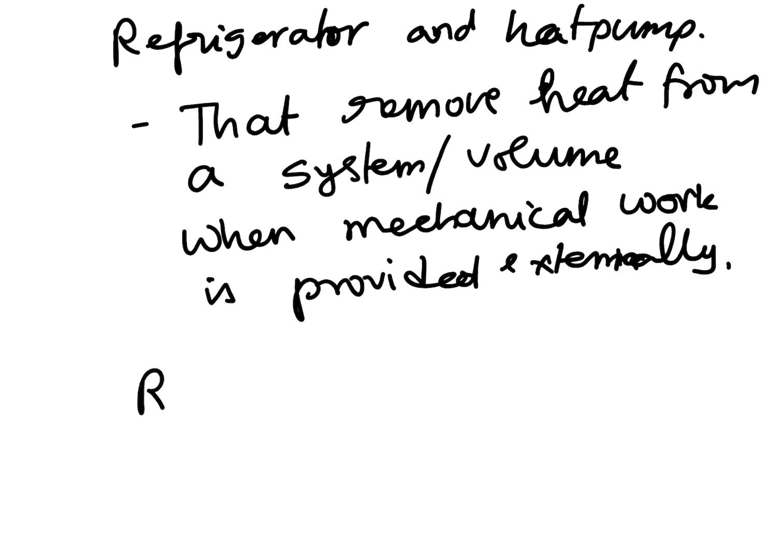These are essentially the opposite of heat engines. A refrigerator takes heat from an environment and dumps it in a surrounding that is at a higher temperature.

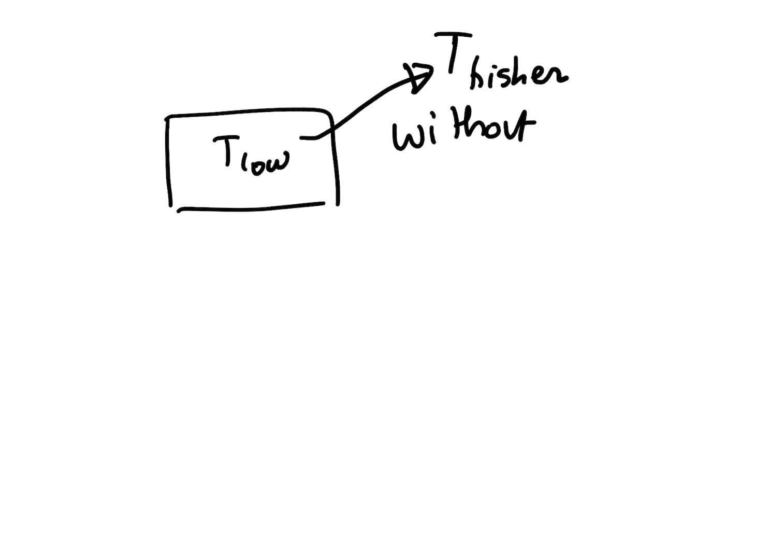That is, you could think this is in direct violation of the second law, which is: if you have a volume or system at a lower temperature and a surrounding at a higher temperature, the second law states that you cannot have energy transfer from the low temperature system to the high temperature surrounding without external work. Without external work, it's not possible. Heat would flow only from the higher temperature to the lower temperature. But with external work, it is possible to transfer or shovel heat from a lower temperature system and dump it into a higher temperature system.

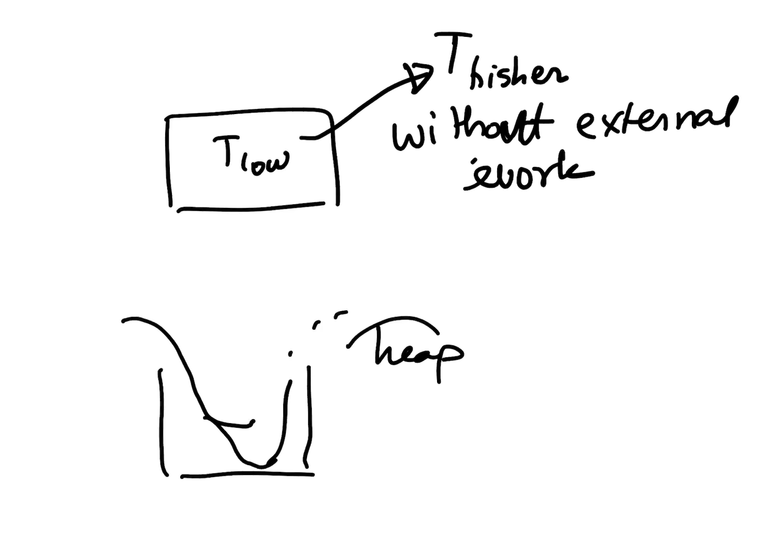This is like, metaphorically speaking, a ditch where you have a crane that puts its jaw inside, excavates the mud, removes it, and piles it up on top of a heap, to remove more and more earth and move it onto a heap. This is the thermal version of that, where you excavate heat from a low temperature system and dump it into a higher temperature surrounding with the help of external work. In the case of earth moving, it's the crane. In the case of the thermal system, it's the refrigerator.

You could draw a schematic of the refrigerator by almost literally reversing the schematic of a heat engine. So let's start the refrigeration cycle, where we have a compressor wherein we input work, we produce refrigerant - we take the working fluid and turn it into high pressure, high temperature working fluid. It is then transported on to a condenser.

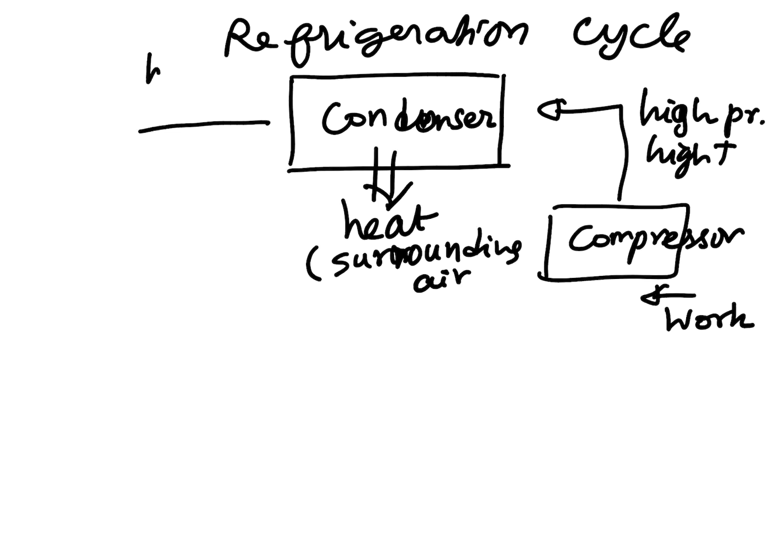Where the high temperature is dumped. So heat leaves the system here, usually dumped to the surrounding air or the outside of a building, and you get high pressure, low temperature working fluid, which then passes on to an expansion valve wherein the working fluid undergoes expansion, and that expansion produces cooling. Then you get low pressure, low temperature working fluid, and this goes into what is called an evaporator.

So remember, this is low temperature, the heat from the system that you want to cool down. Suppose this is your car or your living room. You want to let the heat flow from the hotter car or living room into the evaporator, where this low temperature, low pressure refrigerant is warmed up, and it becomes low pressure, warmed up.

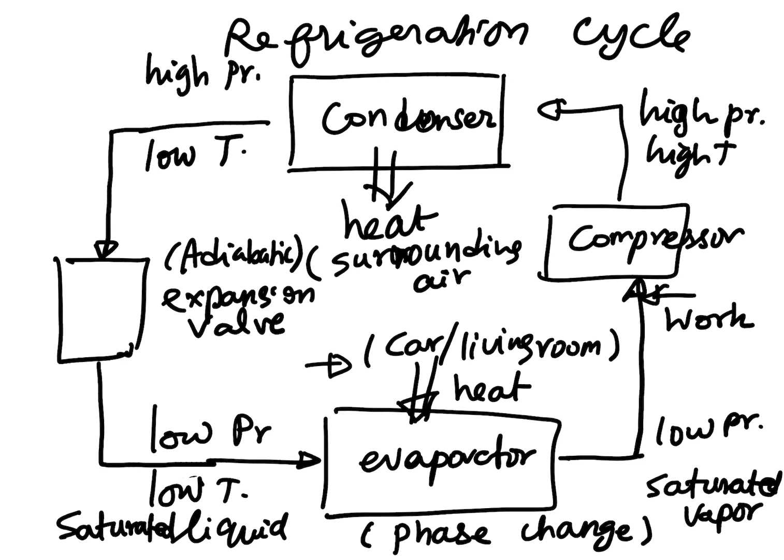So this is the space that you want to cool down. You extract heat from it through the evaporator. You send the refrigerant as a vapor into the compressor where it's pressurized, and the pressurized working fluid is sent to the condenser where it dumps its heat, reduces in temperature, and then the low temperature, high pressure working fluid or refrigerant is sent to an expansion valve where it is brought down to low pressure and low temperature by sudden expansion. It is usually modeled as adiabatic.

And the cycle goes on, producing the desired refrigeration effect. Just like we defined a thermal efficiency for the heat engine cycle, we are going to define a coefficient of performance, we'll call it COP, for a refrigeration cycle, and this COP is defined as the desired output divided by the required input. Now what is this desired output?

It is the heat that you can extract from the system divided by the required input, which is the work net. It is the difference between the compressor work that you need to do and the expansion valve work. The expansion valve usually is designed without moving parts, so it's usually the compressor work that you need to input.

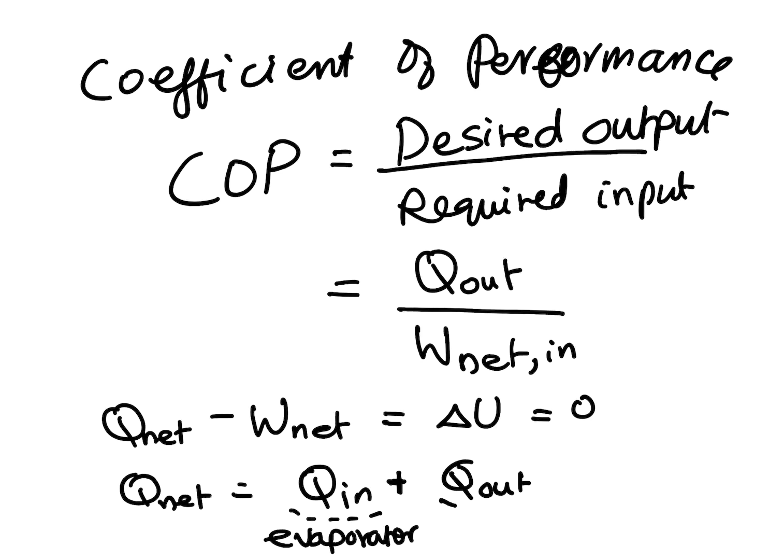Now this is also a cycle, so you can write that the Q net minus the work net equals delta U, which is 0, and the Q net is the heat in plus the heat out with the sign convention. Remember, this is your evaporator, and this is your condenser.

So I have the coefficient of performance for a refrigeration cycle to be QL divided by QH minus QL, equals 1 over QH over QL minus 1, where QH is your heat input.

QH is the heat that is removed from the room. I think I'm going to pause, sorry about the last few seconds. Let me try again. QH is the heat that is rejected at the condenser.

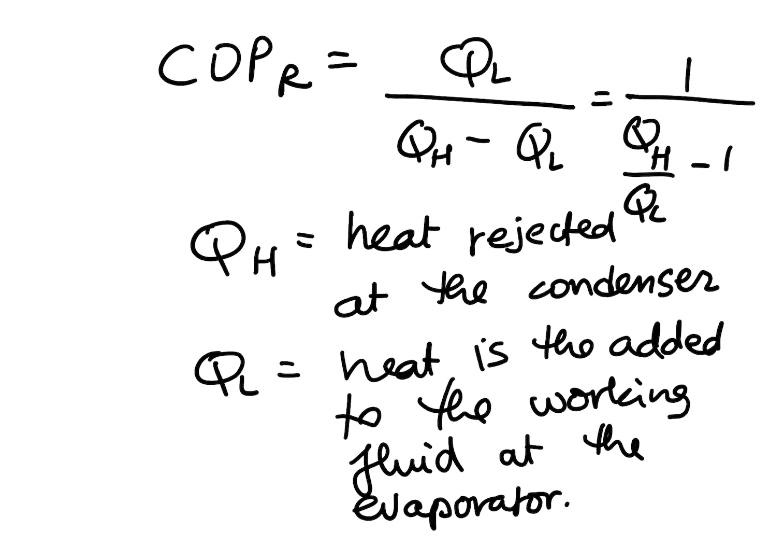And QL is the heat that is added to the working fluid at the evaporator. So the formula COP equals QL divided by QH minus QL is something you could use for solving problems, and we will use it in due course.

To wrap up this unit, or at least this chapter of the module, we saw what is the second law. We saw what are reversible and irreversible processes. We saw what is a heat engine, what is the ideal heat engine or the Carnot cycle. We also saw what is the efficiency of a heat engine.

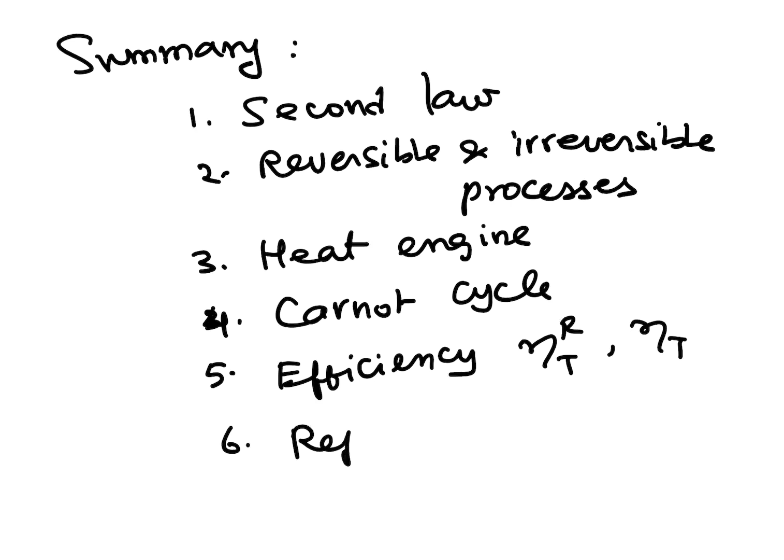And then we also saw what is a refrigeration cycle, and then we saw what is the coefficient of performance for a refrigeration cycle. This is what we are going to be considering for this course. There are more topics that I have not covered, but this is what is fair game for our exam.

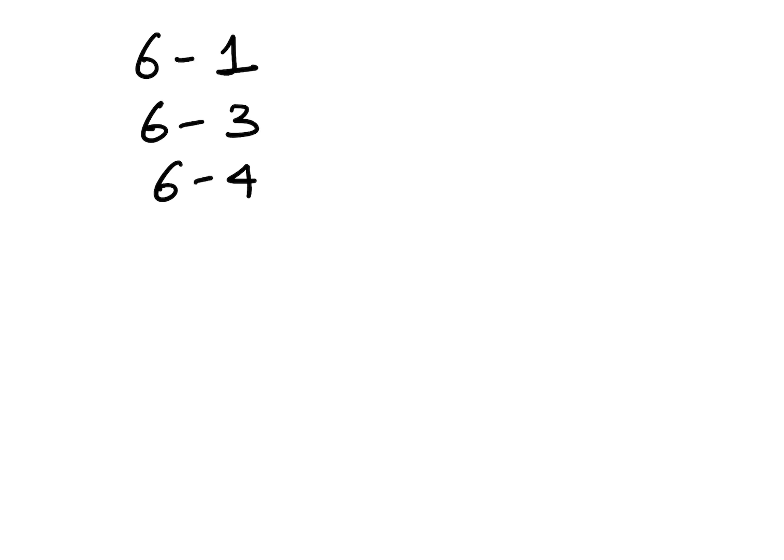Lastly, I want to list all the section numbers that you should look at: 6-1, 6-3, 6-4, the Kelvin Planck and Clausius statements. You also want to look at section 6-6 and the Carnot cycle, which is section 6-7. So these are the sections that you must be reading.

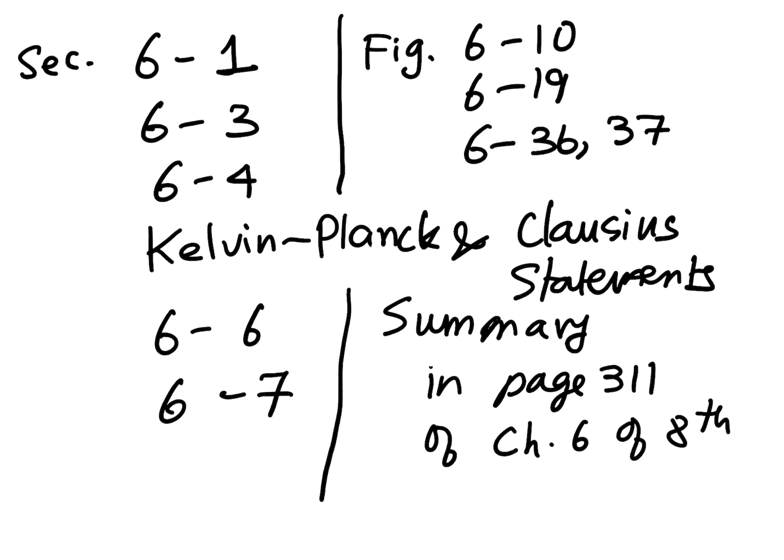There are certain special figures that I would like you not to miss: figure 6-10, figure 6-19, figure 6-36 and 37. You should also go through the chapter summary that is listed on page 311 of chapter 6 of the textbook, 8th edition, Cengel and Boles.

So this will allow you to understand the concepts. Please watch my video, please go through the textbook. If something is not clear, please raise that during class, and you can also set up meetings with me to talk about things. We will do example problems related to this unit during lecture time. Thank you.